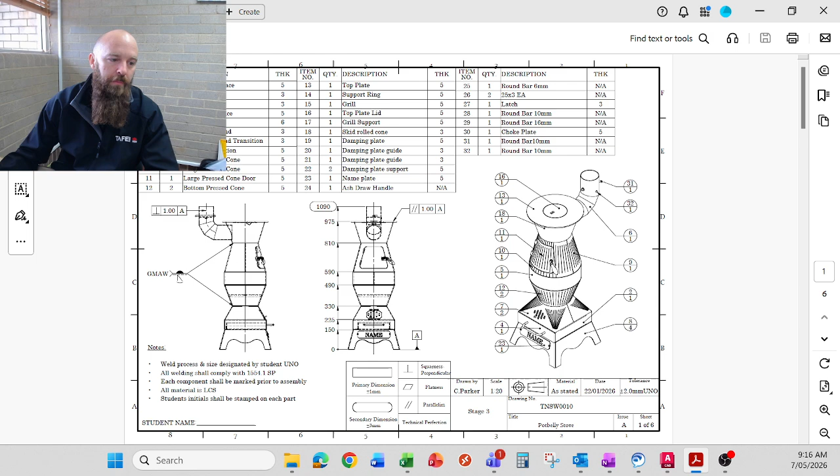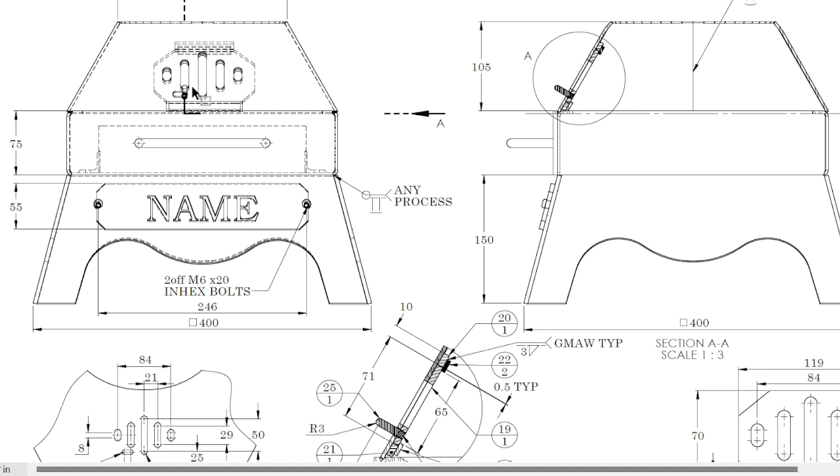So what you guys need to do is on your drawing, find sheet 2. Pretty easy thing to do. Flip page. All right, so we've got the detail for the actual plate, dampener, excuse the spelling mistakes, and then we got the cutout, which is on your squared around. So basically you do need to do a bit of hunting around. Look at the views, look at the section views, look at the detail views to get a bit of information.

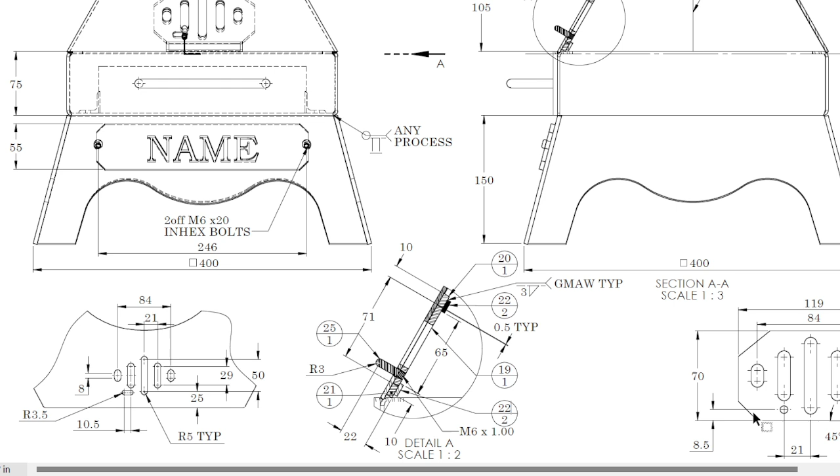We are drawing this part over here up on the right, but we're going to grab a bit of detail off the front face of your squared around, the slot details, because they do or should match up identically. There are a few differences, say with the slotted hole and this hole over here, which is a tapped hole. If we have a look at our detail A, M6 tap. The slot in the front acts as a stopper, so the thing doesn't keep sliding across. So find your information, have a look at it, think about how you're going to draw it up.

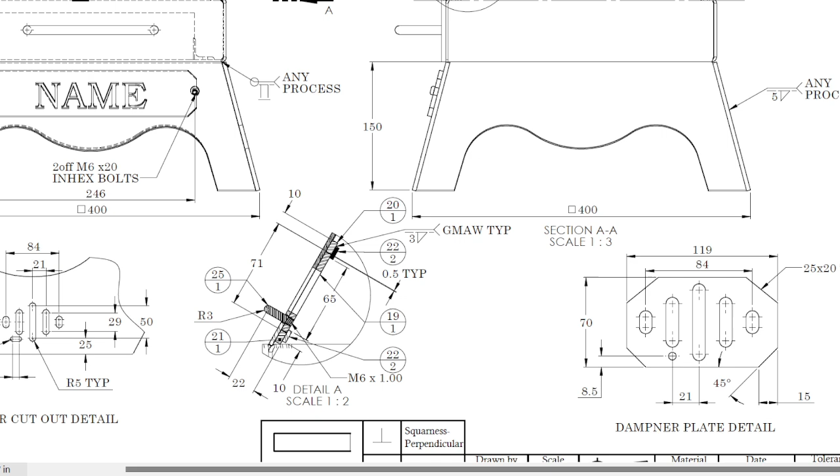I've got a bit of a walkthrough with this video, just to help you, point you in the right direction. If we've drawn a little bit up together, I don't see you having too many issues drawing this up alone. Sometimes it's a good way to start, just to figure out what you don't remember. So have a crack, use this to just prompt you along. But we need to start up our AutoCAD.

Here's one I've prepared earlier. Okay, so this is what we're looking at drawing up. It's not too complex, it's just reinforcing some of those little tools we've learned along the way. So first thing we need to do is start a drawing. You obviously won't have one there. We're just going to add on to the top tab along here. It opens up to our default metric drawing style that we have been using, has been working fine for us, so we don't need any other specific template. So open one of them up.

First step is to save it. Save it as dampener plate, because that's what we are drawing, underscore with your name on it, and we're just going to save it as a DWG, the default AutoCAD file type. Save it in hopefully a stage 3 folder with our unit that we're working on, maybe even a folder for Potbelly or CAD components. Try and organize yourself that way. All right, save it. So that's step 1.

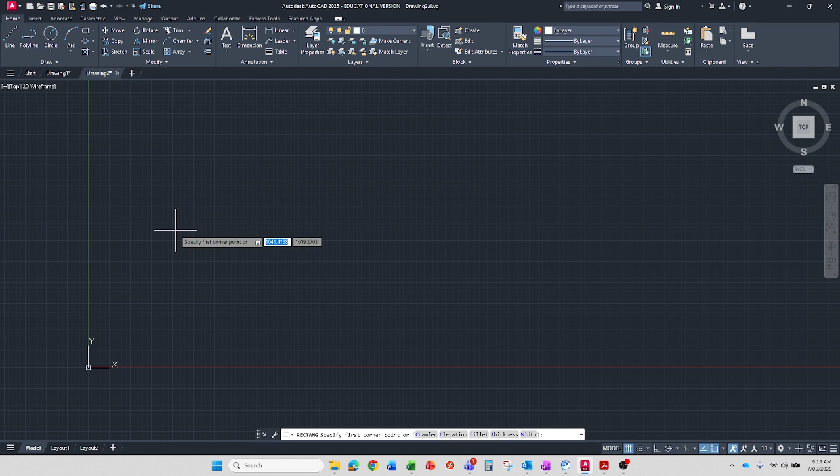Second step is we're going to start drawing this up. I'll just zoom through this. You pause and start the thing. If you miss something, rewind. That's the way this will work. So I'll select the rectangle drawing tool. I'm just going to select somewhere in the positive territory, referencing the XY coordinates there.

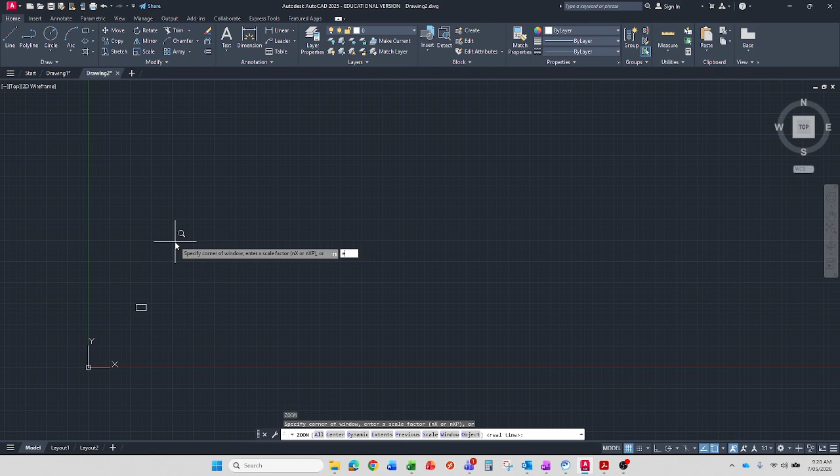Now, our dampener is 119. So I click, drag over to the right, it's going to ask me for my first measurement, so 119. To get to the Y measurement, or the height of it, I have to hit tab. It'll toggle across, and it's 70 high. So 119 by 70, I'll hit enter, and then I'll type in Z for zoom, enter, and then E for extents, enter. Moves me in. Here I am.

Next thing I'm going to do is put some center lines in, and I'm just going to use the line tool to do that. So I'll select line, come over to where I think the center of this top line is, and you can see it snaps onto that. The triangle designates the midpoint of our line. If it's not coming up for you, have a look at your drop-down options box here for your snaps, make sure they're on, should be on.

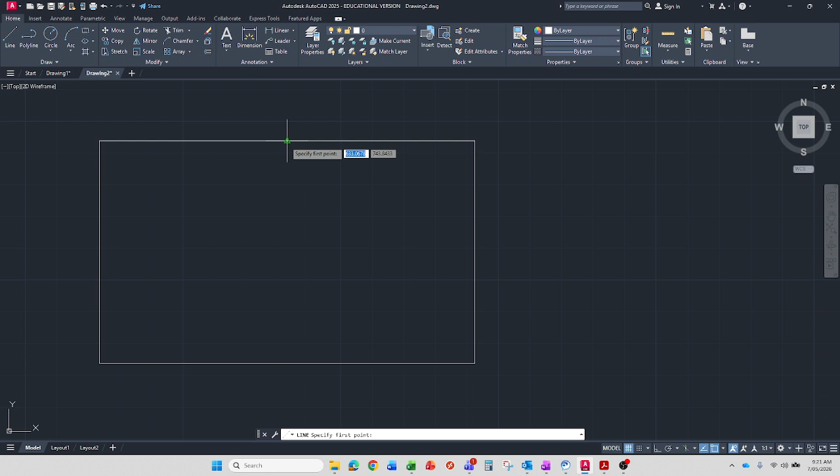Make sure that you have your midpoint selected, that way we can ensure we are snapping onto the center of the line. So just a click and escape. And I'll use my hotkey on my keyboard, L for line, enter, start a new line.

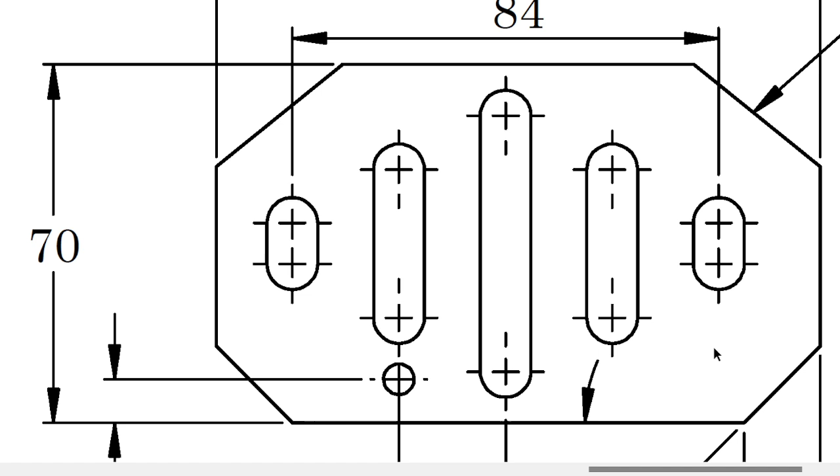I'll put a horizontal one across there too. Because if we come across and have a look at our actual drawing, here's our dampener. A little bit of information, not enough here. These are centralized on the plate, offset slots at 21 mil. If I come across, they're offset 21, and about the center line of our plate, they are offset from there also. So that's how I'm going to do this.

So back to our AutoCAD drawing. AutoCAD does not have a slot drawing tool, so we're just going to draw them manually.

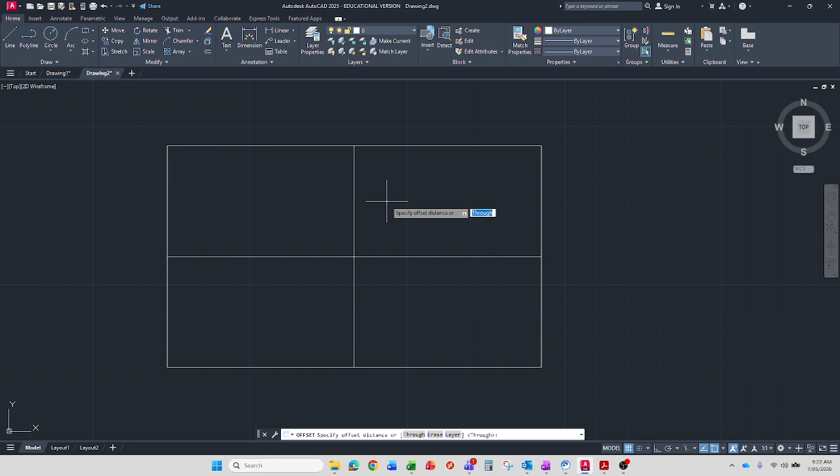First things first, I need to put in center points for my slots. I'm going to do that using the offset tool. I'll select offset, and I'm going to put all my vertical ones in first. They were offset 21 mil about the center line, so offset distance is 21. Enter. Center line, one to the right, one to the left, one more to the left, one more to the right, so they're just spaced out 21 mil.

Escape. Select my offset tool again. Go back and have a look at my drawing and work out what the height or the lengths of my slots are. My middle one is 50 mil, so I'll put in 25, half of that, and go one top and bottom, hit escape.

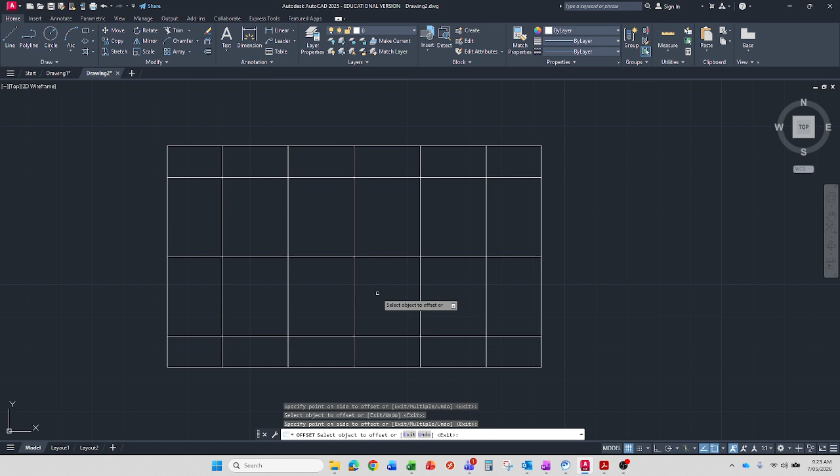Offset tool again, or I can use O on my keyboard as a hotkey. My next one, they're 29 mil apart, so that's 14.5 mil either side of the center line. Top and bottom, escape, O, O, enter. My last little one is 8 mil, so 4 mil either side, top and bottom.

Now I've got a grid pattern in there, and I've got locating points for all the centers of my slots. I'm going to go and use the circle radius tool.

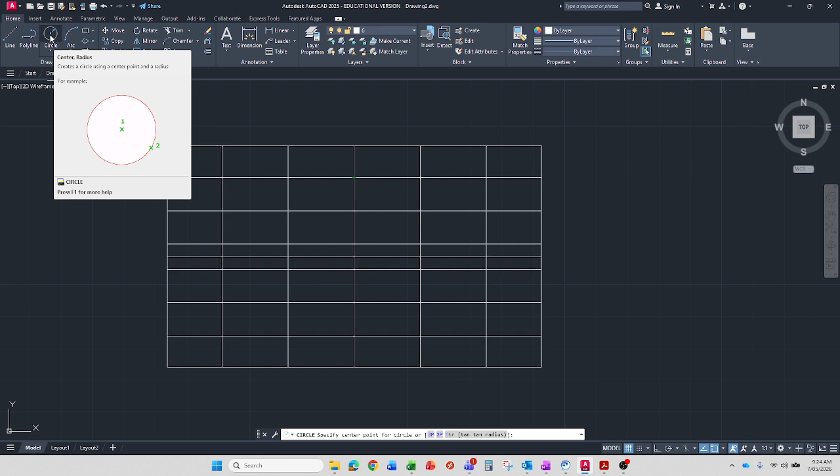Just remember with AutoCAD, you either got the command line here, or every time you select something, right near our cursor, we get a prompt. So it's always asking you, if you hover over this, it gives you a bit of a quick guide on what's going on. Then it'll also tell you how many steps are possibly involved in the operation. So there's 1, 2 steps to get to a circle.

Step 1 is specify, like it says on the screen, a center point for the circle. So I'm going to start there, and then this is a center radius, so center, and then specify the radius. If you have a look at your drawing, what is it? R5, so it's a 10 mil hole or 5 mil radius. So 5, enter.

Now I have to do that if I want to draw a circle for every single hole. That's a pain, so I'm going to use a copy tool. Once I've drawn everything I like, or my circle that I want, I'm going to select it, and I'm just going to copy it around the job because I don't want to keep doing that. It's probably a quicker way.

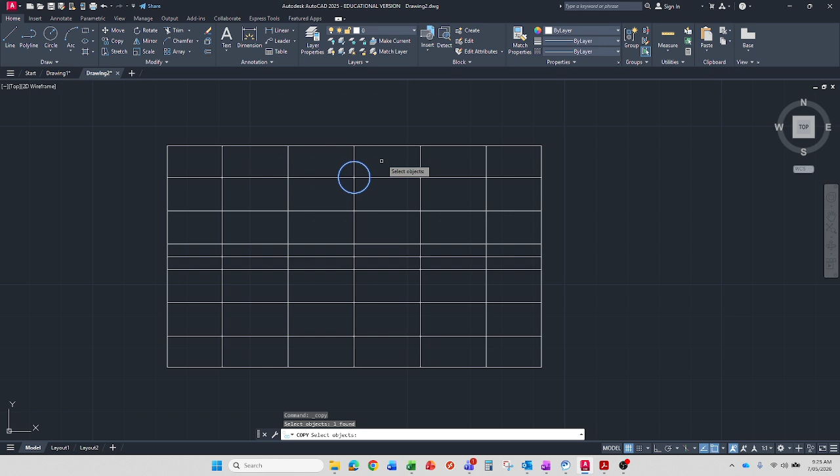So with the copy tool, select copy. Anything you want to copy, you select. Once you've got everything you want, for me it's just this circle, I hit enter. The next step is to reference a point to copy it from, which is just going to be the center or my base point there.

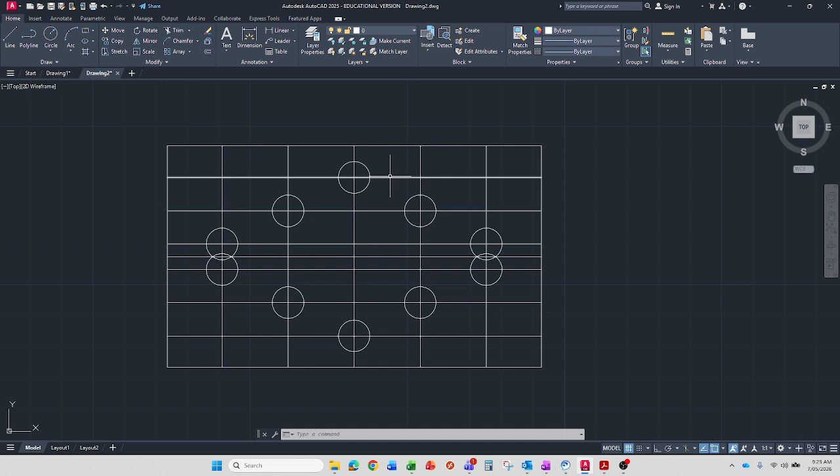And then I can just go through and look at your drawing, try and figure out where the center slots or center marks for your slots are supposed to be, but that should follow that pattern. Once you're done with all your circles, just hit escape.

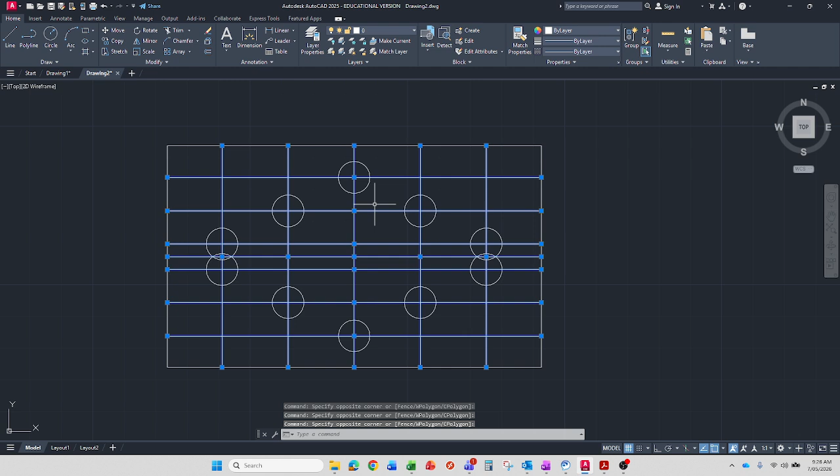And then the next part is to actually turn these into slots now. So we need to connect this point from here to there, but it's getting a bit busy. So all these lines that we just put in, I'm going to use my selection box, my green panel, just to help me select all these lines, and then I'm going to hit delete. I don't need them anymore, they're only there to help me reference these centers for the circles.

Once I've done that, I'm going to go up and select my line tool, and I'm going to draw from quadrant to quadrant, just like that. Now it's not snapping on to a quarter mark on your circle. Go over to your snaps options and just make sure that the quadrant option is also selected.

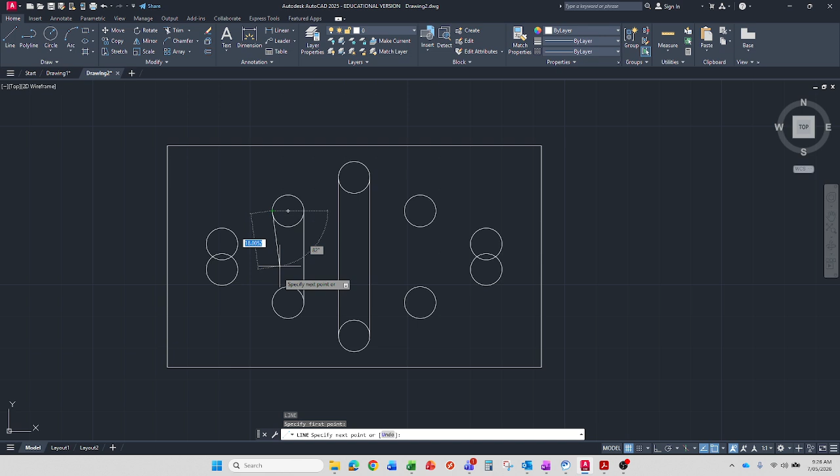And then I'll just maintain accuracy. So what I do now is I'll just put lines in between all of these. So I go L, hotkey L, enter, one here to there, escape, L, enter, there to there, escape, L, enter, there to there, escape, L, enter, and so on and so forth.

Using the hotkeys on your keyboard, getting familiar with that just makes these operations a little less painful, a little quicker, and makes you more inclined to turn to this kind of software to use instead of turning away.

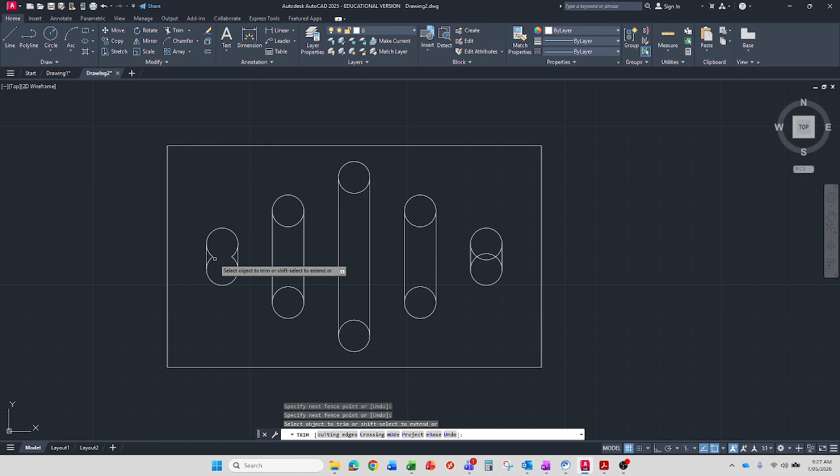Once you've got all your lines in, we need to cut out all the stuff that we don't want, and we're going to use the trim tool for that. So I'll select trim and use it in a couple of different ways, just to take out all these inner parts of the circles and clean them up. And then we're basically nearly there.

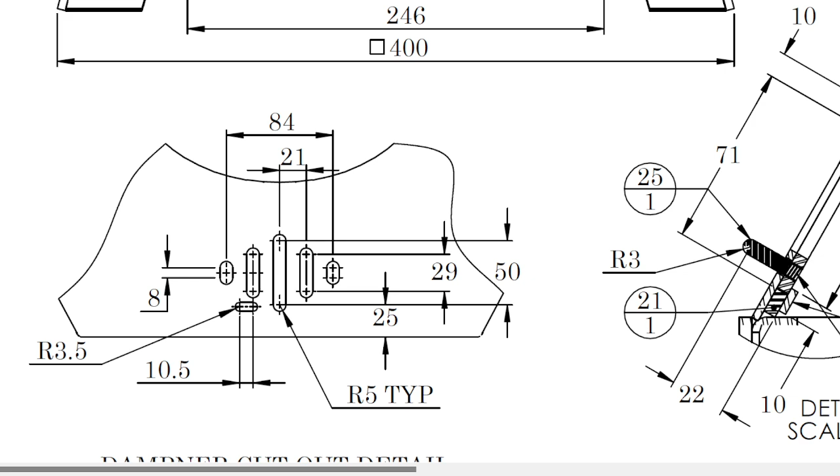Next thing we need to do for internal detail on our dampener is have a look at this option here. Now, don't get confused, we're not putting a slot in. Remember, we are doing a tapped hole, because over here is the actual plate that we are drawing up.

I've gone through with you guys before why we shouldn't use the plasma to cut out a hole that we're going to tap, but we can use the tools on the plasma to help locate it on the part. So it saves, one, error in marking out, and two, speed and accuracy. There's a lot of benefits. I'm sure you guys are exposed to a bit of that now with etching and marking and all that.

So what we need to do is pinpoint this location, so it shares the same center line as this slot. However, it's 8.5mm up off the bottom of our base there.

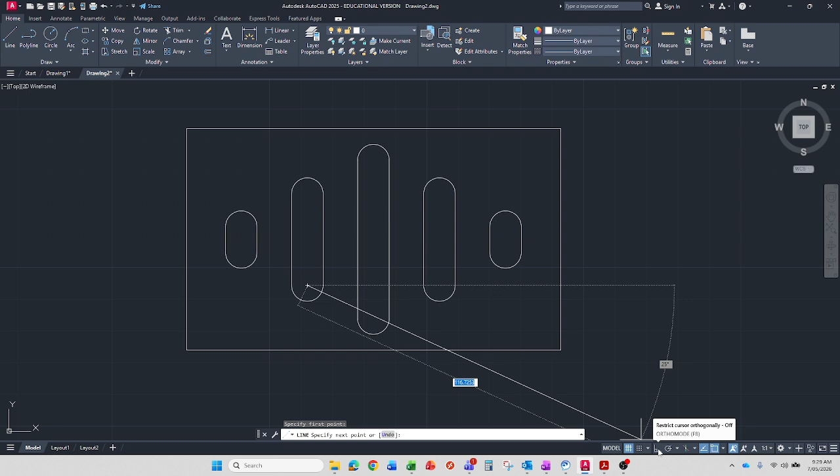Going back over to our AutoCAD drawing, I'm going to select the line tool. If I hover over this circle, you can see it picks up the center point and my cursor will snap to that when I'm drawing. I just want to chuck a line straight down there. To make sure that I am coming down flat, I'm going to select my ortho mode down the bottom here, and that'll just maintain a nice 90-degree line.

The next thing I'm going to do is offset a line, and it was 8.5mm up off the bottom. So I go offset 8.5, enter. Now if I select the bottom line, see how it offsets the whole rectangle? That's because when I drew this at the start, it was drawn as a rectangle, so AutoCAD, if I hover over it and select it, does the whole thing. It recognizes it as a complete part.

If I didn't want to do that, and just wanted this individual baseline to come up, I can go and explode my rectangle, and that breaks whatever you've got into individual parts. So I select explode, select my object, and hit enter. Now when I go to offset at 8.5 mil, it's just going to bring that baseline, that single line, up, because now my rectangle is in 4 different lines, bits and pieces.

So these lines, again, we're just using as framework to locate this point. What we're going to do, on the drop down option on our draw tab, is select points. And then I'm just going to click once. You just need to be very careful with points - click once and then hit escape. I don't want to put 30 points on the page.

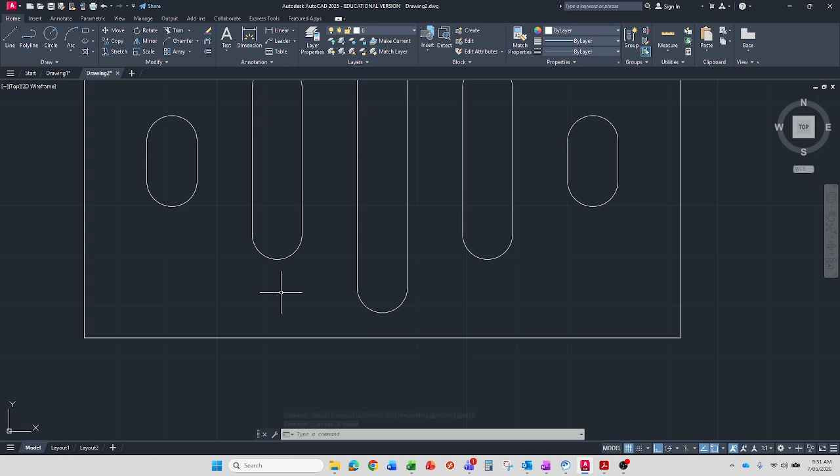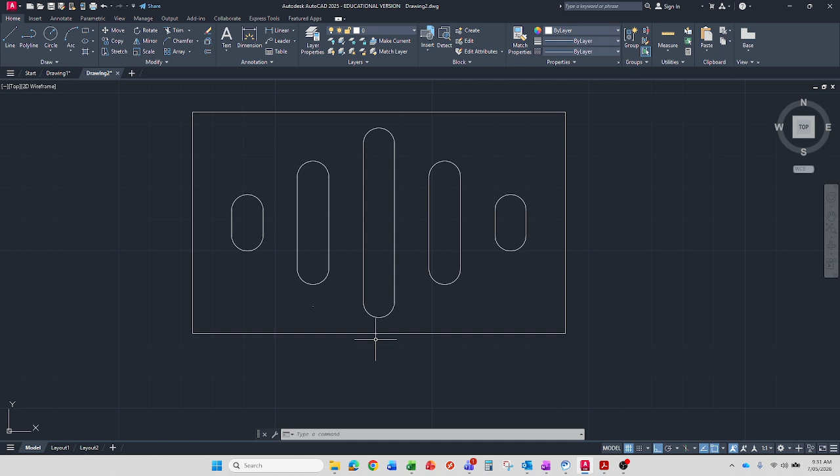The way that we can path this when the plasma comes along, we'll either etch a dot or we might even just pierce a hole. If your machine had a plate marker or a scribe, you could put something on there to mark it up. But what you don't want is 4 of them there, because then if it doesn't get picked up, it might come along and try to pierce 4 holes or whatever else. So you just have to be a little bit careful when you're making things to be cut out.

But apart from that, we just have to put some chamfers on the outside of this now. If we go back and have a look at our drawing, we can see that we have 2 different types of chamfers. Down the bottom here, we've got a 15 by 45, and up the top here, we've got an uneven leg length - a 25 by 20.

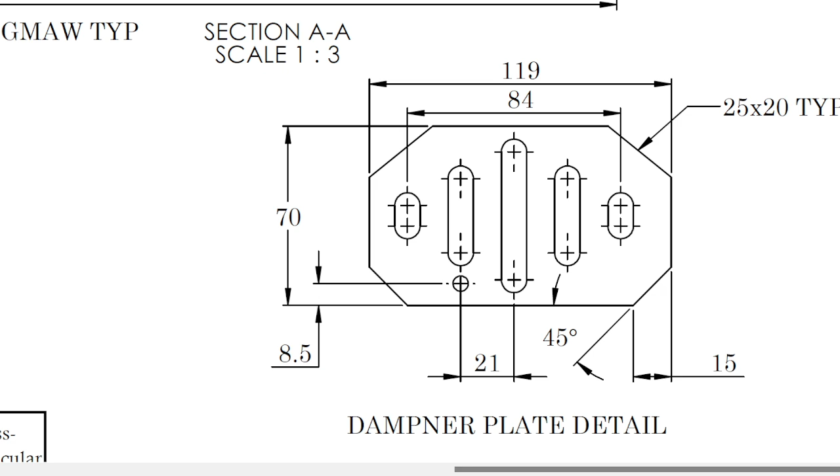It's chamfer all the same, but the operations, the way we go about it in CAD, is slightly different. So if in your modify ribbon you do not have the chamfer option available, I think it defaults with the fillet. You just got to go to fillet, come across the drop down option, and go chamfer.

Come over onto the screen. Now, because we're doing a couple, I'm going to press M on my keyboard first and hit enter, and that is for multiple. Then I need to tell it how I'm going to specify the dimensions for this chamfer. Because it was given to me as an angle and a measurement on the drawing, I'm just going to select A for angle.

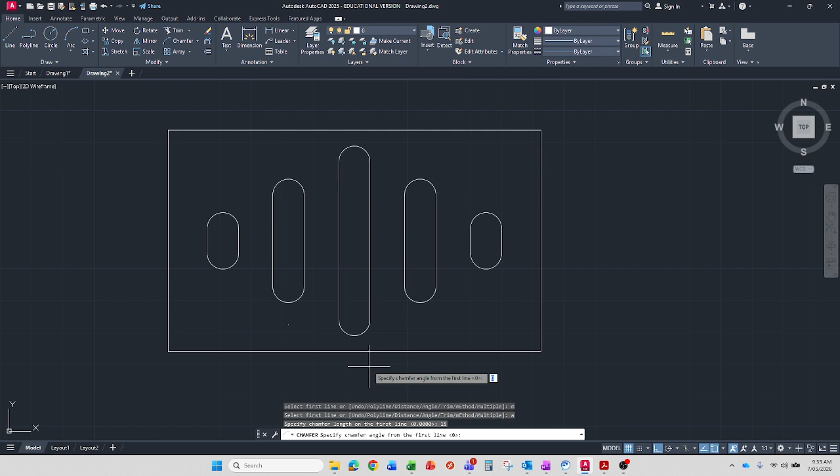Then it's going to ask me, how big's the chamfer? Well, it's 15 mil, enter. And then what angle was it at? 45 degrees, enter. Okay, and that's all the information you need to put in. Then you need to select your lines, and it gives you a preview.

Before you do it, you select the bottom and the left, and the bottom and the right. And then once you've done those 2 chamfers, you hit escape. Then we can go back and select the chamfer again for these top 2 chamfers. Again, M, because we're doing a couple.

But this is where it changes, because it's an even or an uneven leg length. I am going to specify both sides by distance, so I'll just put D instead of A. Now this is one little tip, I guess.

Whatever measurement you put in first is the measurement it's going to pick up when you first select your line, or your first selected line will be the measurement that you put in now. So I'm going to put in 25, enter, and then your second measurement, which is 20, will be the second line length. It might make more sense when I go and do it.

So 20, enter. So if you have a look at your drawing, you can see that this distance from here and down is the longer length of the chamfer. So I put 25 in first. I want this one to be the 25 from here in. And then your second distance, which I put in as 20, is the shorter length, from there down.

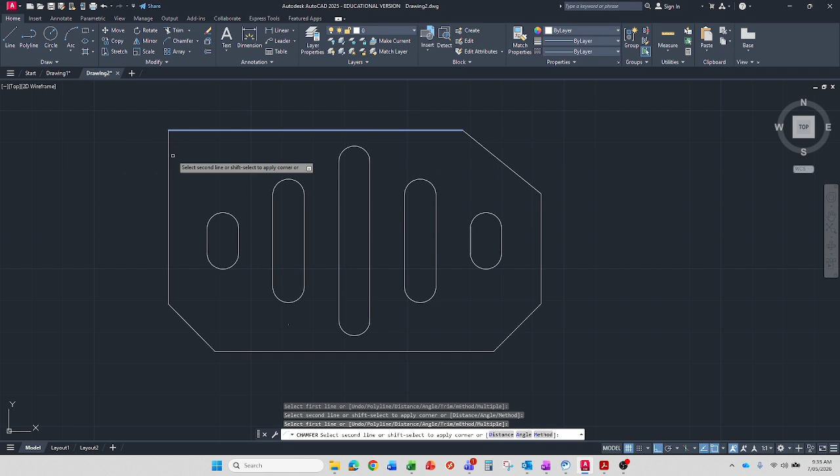So I select this one because I want that to be the 20 mil. I want this one to be the 25, which I put in first, so I'll click first. And then I want this one to be the 20, so I'll click that second because I put it in second. Okay, so that's sort of how it works.

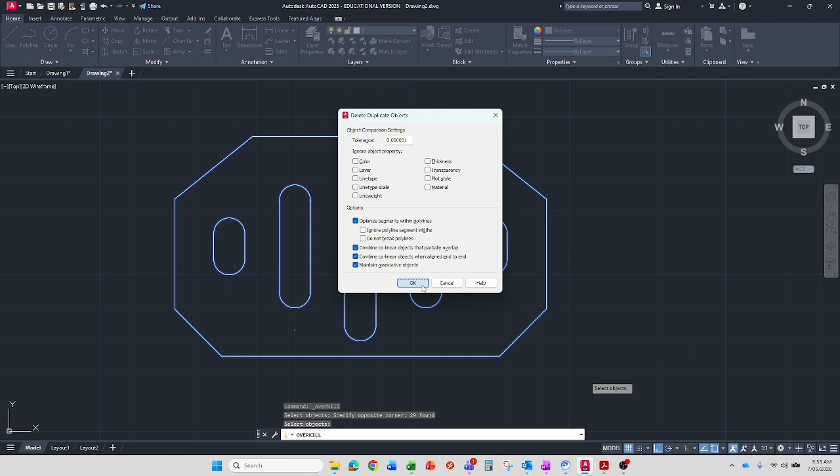So drawing errors, in case you've got multiple offset lines where you didn't need to or didn't want them, what we're going to do is tidy the drawing up. Go to modify, grab the overkill or delete duplicates. Select everything and hit enter. We're happy with the default settings there, so I'm just going to go OK, and it gives you a readout of whether you actually had any duplicate items. Hopefully 0, give yourself a pat on the back. Hopefully you had none.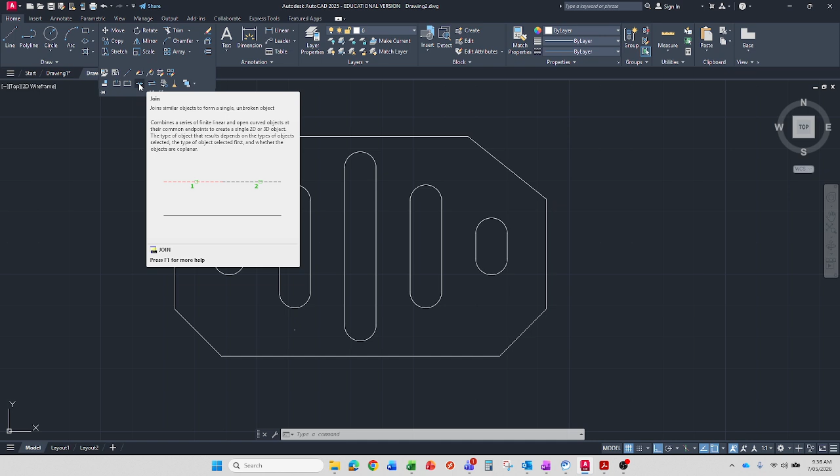But anyway, once you've done that, another thing I want you to do is join it all up. In the same place you went for with the little broom, we want to join, that's the 2 arrows going together. What this does is it takes us back to how we went when we drew that rectangle. So I can select this outside perimeter now, and it's completely joined. My slots are completely joined. I don't have to select each line and then the half circle to select the whole component.

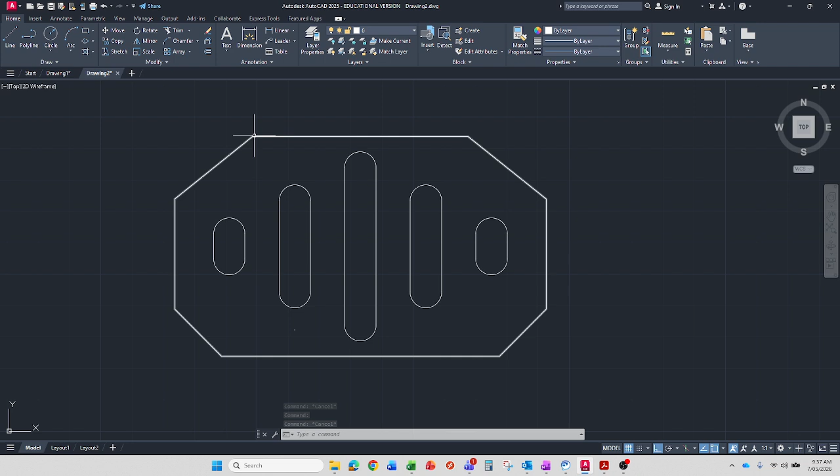This helps the pathing software that we have at the moment recognize that this is a complete shape. It will help it recognize that this is an outside profile and these are complete inside profiles. So it just helps the process along when we've got to go put offset distances for kerf clearances and all that sort of stuff on here.

So once you've done that, save it again. Just click that button. Do this periodically every 10 minutes. You should get in the habit of doing it, just in case, so you don't lose your work.

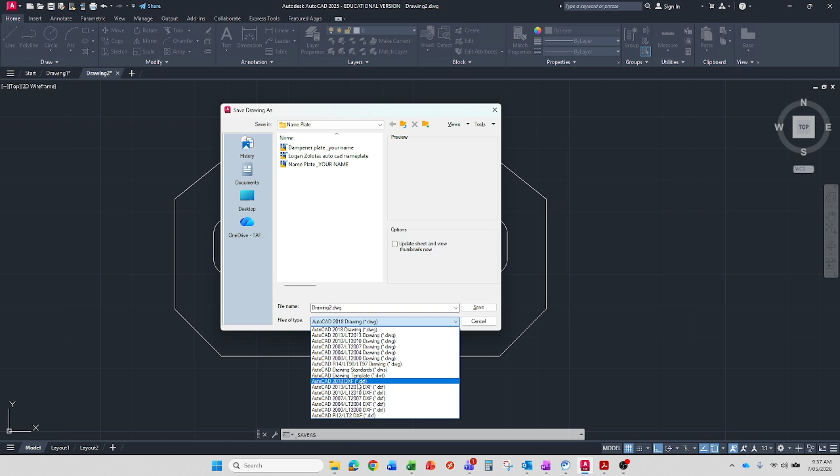And then once you've saved it, go over to save as. This is where we save it as a different file type. We save it as our DXF, same file name, so dampener with your name. And then you need to email it to me so I can check your work.

And that concludes our drawing of the damper. So, well done.